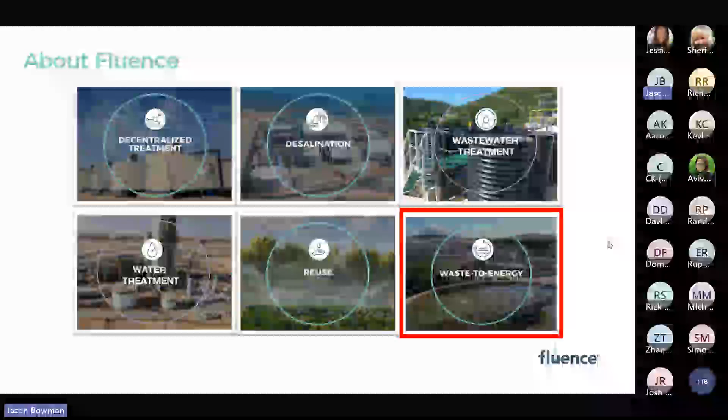There's a lot of different treatment categories associated with biogas projects. A lot of times we'll have not only the anaerobic system, but also a separate or tag-along wastewater system, a reuse system, or a potable water system in some cases that get bundled with these waste to energy projects. So it's possible to roll or incorporate other aspects of water and wastewater treatment into biogas projects under this tax incentive umbrella, if you will.

Typically, when we're doing waste to energy projects, the minimum tax credit that we see is about 30%. I'll get into the details on how this is broken down later in the presentation, but just right up front, so everyone has a basis for moving forward: anytime we put a capital expense or a cost of a project on the table, roughly 30% of that generally is qualified or approved for a federal tax credit.

So hypothetically, if the cost of your waste to energy project is $1 million, most of the time $300,000 of that is available as a tax credit. So the realized value is closer to $700,000. Again, just as an example.

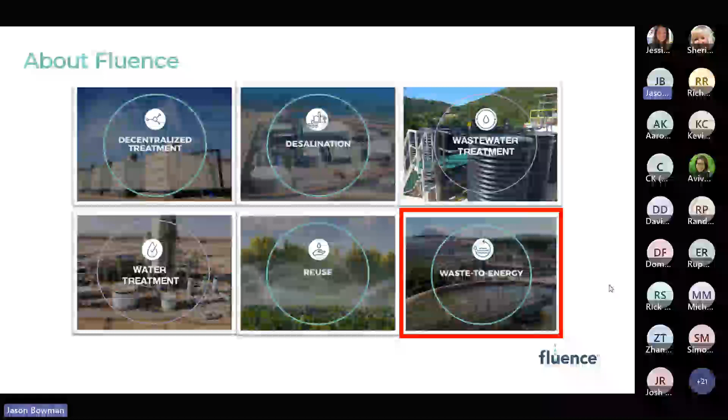The maximum, as written into the Inflation Reduction Act, is 50%. I will say in practical operation, the highest project that I've personally been involved with had about a 45% tax credit. Not to say that 50 is not possible—there's just some additional bonus areas that you really have to be aware of to maximize and reach that full 50% value.

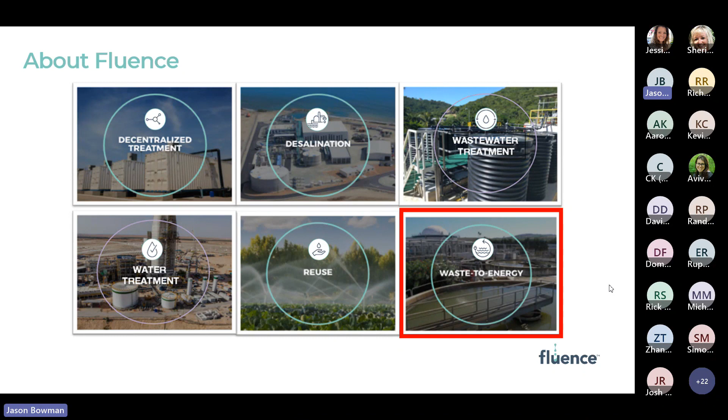So let's talk a little bit about waste to energy and what we mean by waste. When we talk about waste, we're typically referring to either wastewater or byproducts of industrial manufacturing. That could be food and beverage industry—meat, chocolates, breads, veggies, fruits—as well as CIP processes, or even just the primary wastewater discharge from a manufacturing facility.

To consider a waste to energy process, the waste obviously needs to be organic in nature, so it needs to have a readily biodegradable BOD value. We normally like to see a minimum BOD value of 2,000 milligrams per liter in terms of concentration. Below that, the economics kind of stretch out a bit. So in general, higher BOD values and low flow situations have the most favorable ROIs in terms of how quickly the project pays for itself.

The basics of waste to energy are pretty simple. You basically take an organic waste, put it into a tank without oxygen, and under the absence of oxygen, the bacteria that accumulate, or acclimate, take the hydrocarbons, take carbon, take hydrogens, put it together, and make CH4—basically make biomethane.

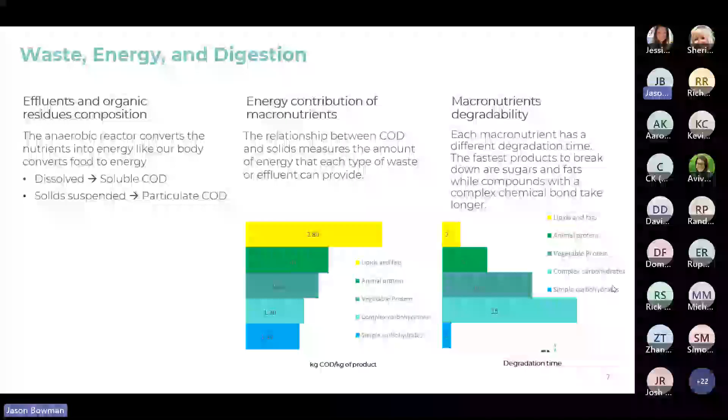Just so everyone can compare biomethane versus other forms: biomethane being CH4, propane for example is C3H8. Then you have compressed natural gas, liquid natural gas. They all have a different chemical structure, but they are all somewhat derived from the same base natural gas product. The physical application is a bit more involved.

What I want to demonstrate on this page is that understanding the feed source is probably the most critical element for a proper waste to energy design, or anaerobic design. We typically like to break down—you can call it waste, feedstock, or wastewater, however you want to define it—they're all kind of the same here, and I'll use them interchangeably a lot.

There are five main categories that we typically break it into: lipids, oils, fats, greases, things like that; animal proteins; vegetable proteins; then complex carbohydrates and simple carbohydrates. In terms of the weight of organic nature versus the weight of the waste or feed product you're putting in, those five categories all carry different energy values, and therefore they all have different degradation times. So understanding the feed source directly impacts the ROI, because it directly impacts the type of digester we determine is going to be the best fit.

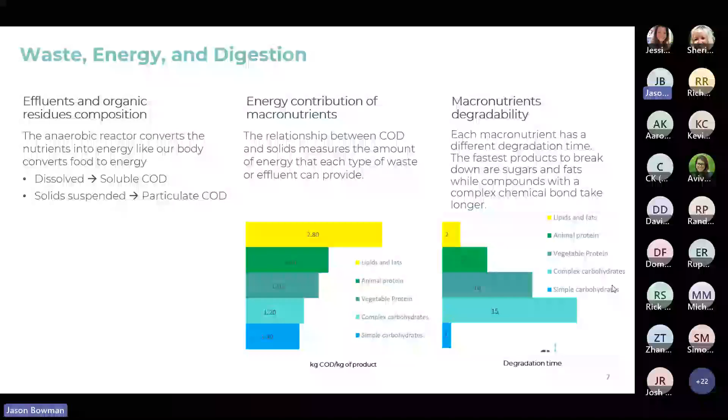It directly impacts the size of the digester. It directly impacts how much gas output there's going to be or how much we can anticipate. And it directly impacts the performance and the stability of the process. So understanding the composition and degradation time are critical as a first step.

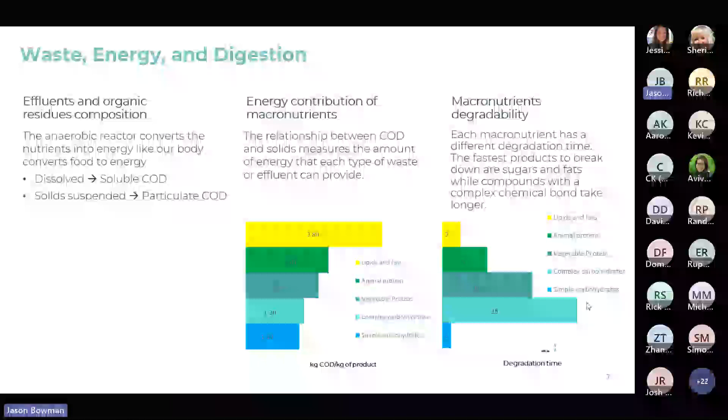So yeah, understanding how all these feeds can be applied or if they can be combined in some cases really plays a big part on return on investment. And when we talk about return on investment, basically what I'm saying is how quickly does the system pay for itself? And methods of paying for itself can be either reduction in sludge or energy production or gas production that can be used for offsetting your current natural gas needs, taking the biogas all the way to renewable natural gas where you can put it into a pipeline.

There are a lot of different ways that this can be repurposed. As long as the biogas is being repurposed and not flared, it will qualify for a tax credit. So basically understanding these feedstocks, we can determine where's the value. Is it in reprocessing byproduct or your waste product? Do you have more value using it as an animal feed byproduct? Is there more value using it for biogas utilization? So all this, how does it drive the capital expense for a waste to energy project?

In addition to the previous table here, we've kind of broken down the theoretical values of different feed sources or byproducts or waste products, however you want to define it. So in terms of the mass load of organics versus the mass load of these waste products that you're putting into a digester, it shows how much potential methane can be produced. So we can take this methane and we can convert it into electricity. We can convert it into thermal energy.

The most simple form of repurposing biogas, and I apologize, I use biogas and methane interchangeably sometimes. Technically, biogas consists of a combination of methane, water vapor, and CO2. So the methane content is typically less than what the actual biogas content is, obviously. So the simplest way to repurpose and qualify for tax credits is to basically take this methane and use it within an existing boiler.

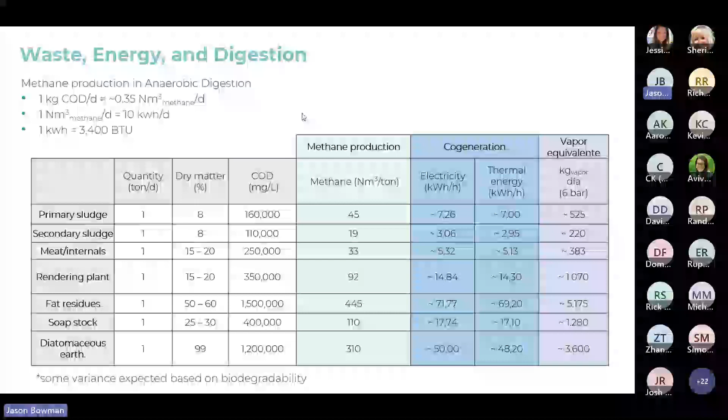That boiler could be used for steam, could be used for heat, could be used for cooking. There's a number of different ways that that can be utilized. That tends to be the simplest form that you're going to qualify for the minimum tax credits. Beyond that, going to cogeneration, electrical generation, or thermal generation, these areas really start to improve the ROI structure for these projects. We have projects out there, mid-sized projects, having a few kilowatt of power output is not uncommon.

Medium to large or larger projects, we have megawatt generators out there that are really putting out a lot of energy. Those projects definitely pay for themselves very quickly. And if there's a way to tie into the grid from that, even better. There are, let's say, kickback isn't the right word, but there are multipliers for putting energy back into the grid and additional tax credits there that really boost the value of these projects.

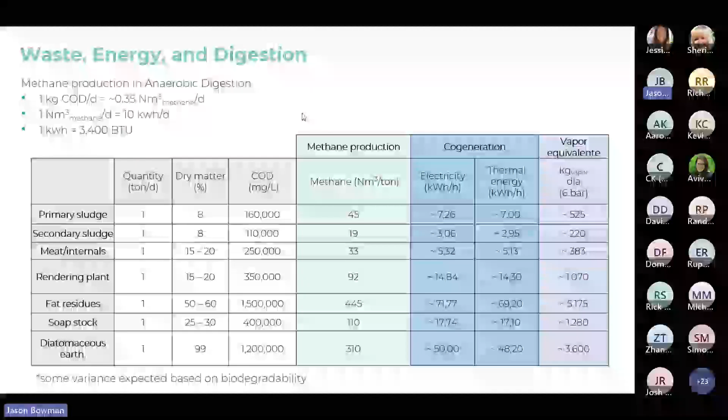Otherwise, small and medium-sized projects, it's very simple to go to electrical generation and use it internally at the factory for the production process. Depending on what your factory demand is, in some cases, we see offsets of 20, 30, 40%. It just depends on the relative nature of the waste or feedstock that we're using in the digester process. So here we've laid out a few things: primary sludge, secondary sludge, meat internals. The list goes on and on. I mean, there's so many different byproducts.

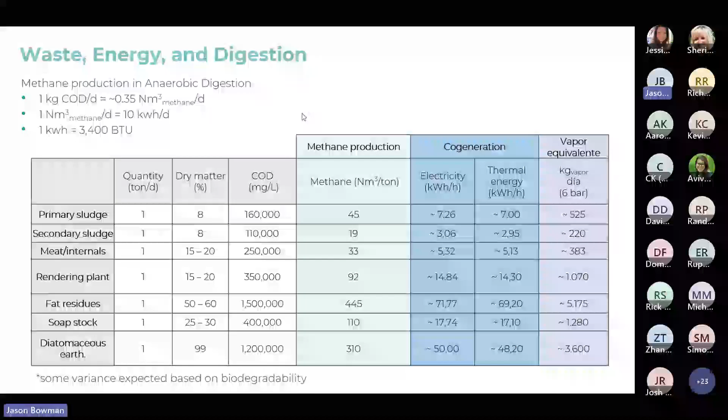Again, when you get into the biofuels, confectionaries, chocolates, bakeries, breweries, alcohol, refreshment manufacturing, the list just goes on and on. And the COD content is really all over the map. As I mentioned in the previous slide, we typically want to see BOD values greater than 2,000 milligram per liter. So roughly a COD value of, say, 3,800, 4,000 or higher. That's kind of the minimum where we would apply a digester project, just because we need to make sure that we have enough organic content there.

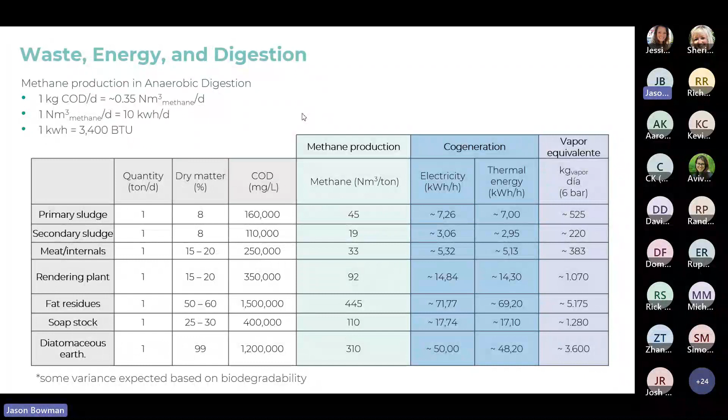But when you get to the point where you have existing waste products or waste sludges that can be combined with primary plant effluent or primary discharges, you can really start to improve the impact of the digester process.

So we briefly discussed why the feeds are important and a rough concept of how to apply the biomethane. Understanding the feed makeup is really the first step. That's the first thing that we look at. The second step is understanding how the reactor configurations differ, as each reactor has a different economic impact. So there are different operating conditions required to maximize the efficiency based on the type of feed that we have.

So that's why we have so many different options for anaerobic digestion. We have your more conventional continuous stirred flow tanks. We have a recuperative thickening process where we have a digester in combination with essentially a glorified DAF unit that we use to boost the bacterial populations, boost the solids populations. And then we have granular technologies when you have systems that have more, let's say, soluble, basically just liquid, and it's like sugar water or starches, things of that nature.

Historically, anaerobic systems were quite big and bulky. Most of the antiquated systems are like old anaerobic lagoons. You don't really see a lot of new anaerobic lagoons being built. Can they work? Yes. Do they work? Yes, but it's not as efficient, very land intensive, and the biogas collection out of a lagoon process is completely different than these more high rate standalone tank options. Much more homogeneous biogas collection, biogas capture, more stable biogas production in these types of systems compared to the old school lagoons.

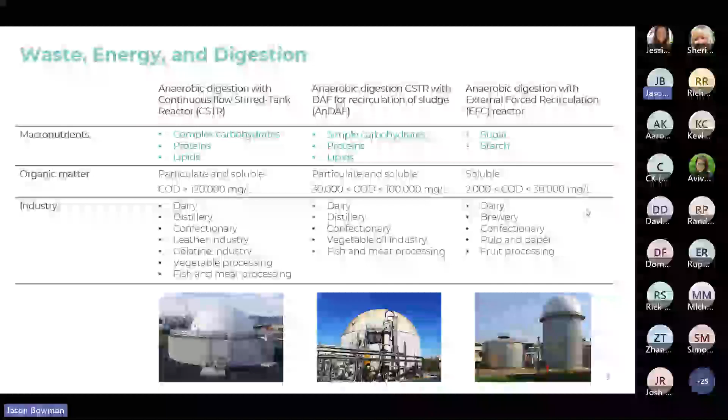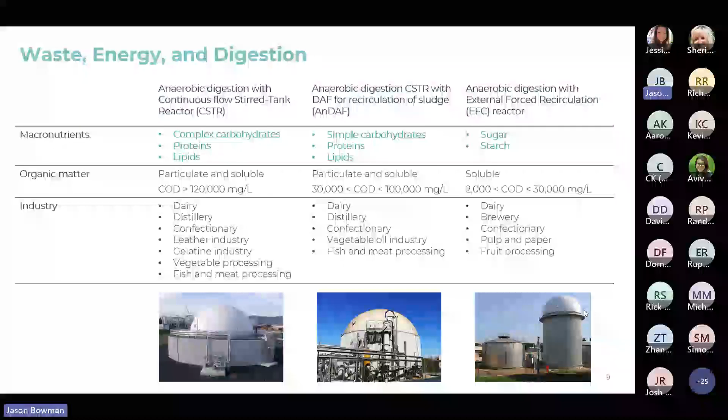Hydraulic retention times typically can be a few weeks to only a few hours. Again, it depends on the type of digester process and the type of feed, byproduct, or primary effluent that we're trying to process here. So most projects that we are currently involved with, I will say the ROIs, factoring in tax credits, factoring in disposal costs, are probably in the 2 to 3 year window, also factoring in the electrical cogeneration side of things. So these projects pay for themselves very, very quickly, and the tax incentives have a lot to do with that.

So the optimal projects, just to recap, are typically those with significant hauling costs that can convert waste to electrical generation. These projects are going to have a very short return on investment. And in addition to that, and later in the presentation we'll hit this in more detail, there are methods for actual revenue generation from these facilities, whether it's electrical revenue generation or renewable natural gas generation. And there are some newer methods out there, which we'll talk about briefly at the end of the presentation, where we can basically do an energy storage or even a data banking, data mining option. Again, these are relatively new, but those are new ways to generate revenue on site for decentralized facilities.

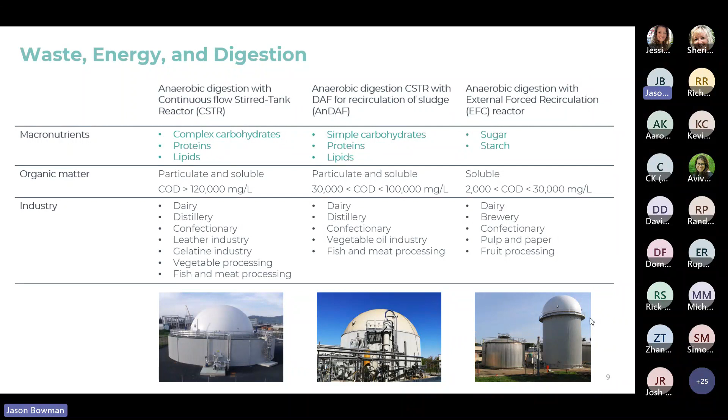So briefly, before we get to the tax credits, part of what the Inflation Reduction Act, part of what the EPA, part of what Congress, part of what everyone is trying to do is boost the sustainability aspects of not only these projects, but just life in general.

You turn on the news and there's always some crisis with famine or water scarcity or even water pollution. So what the United Nations has done is basically set up a list of sustainable development goals aimed at setting minimum metrics to ensure quality of life, environment, and geopolitical landscapes. Obviously, clean water and combating water scarcity is at the front and center of that.

Europe has kind of been ahead of us here in the US in terms of how biogas has been applied and how it can help improve or promote energy independence for industry specifically. So they've been ahead of us for a while here. The beauty of all this is it's relatively simple to create a positive and circular impact for most industries.

If you're an industry that produces a lot of waste, either wastewater or waste byproduct, liquid, solid, slurries even, if it's high on organics, there is an inherent potential here to put this to work while creating a more long-term sustainable business practice, but also a better environmental impact.

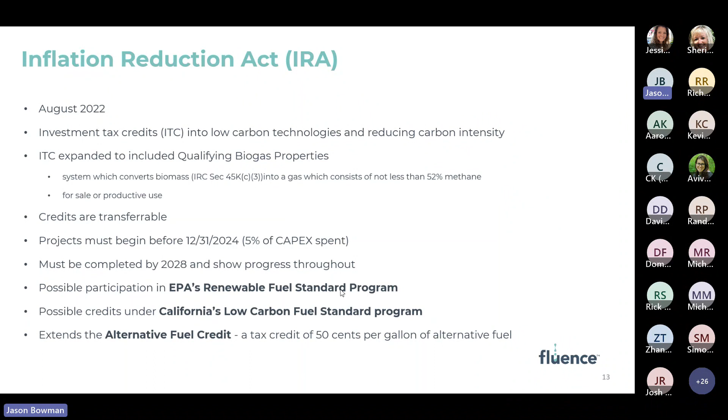I believe that is on the next slide, I apologize, I'm getting ahead of myself. So the maximum investment tax credit for qualified biogas properties is 50%. You can find this information in sections 45 and 48 of the Inflation Reduction Act.

Basically, the program establishes a base minimum of 6%, but most projects qualify for prevailing wage, so there's a 5x multiple on that 6%. That's how we arrive at this 30% eligible tax credit. Most projects I've been involved with in North America, 30% is kind of the minimum, that's typically where most projects start.

There are two potential bonus credits, one being an additional 10% for domestic content. Essentially, what you have to show is 40% of the manufactured goods for the biogas project are local costs - 40% of your steel, your pumps, equipment, erection, installation, a manufactured end product. If 40% of that is domestic content, then there's an additional 10% bonus, so fairly easy to arrive at a total ITC of 40% in these cases.

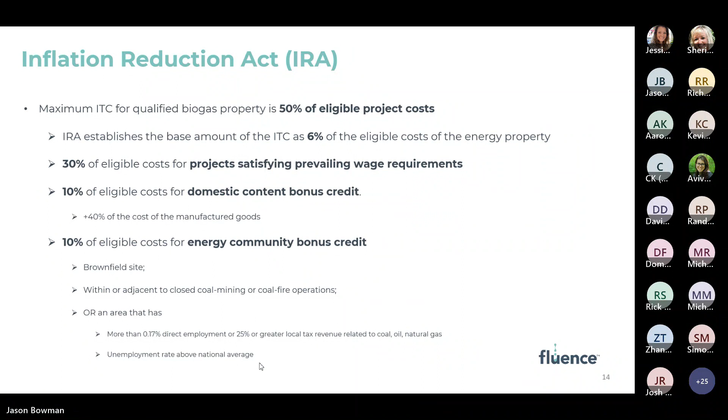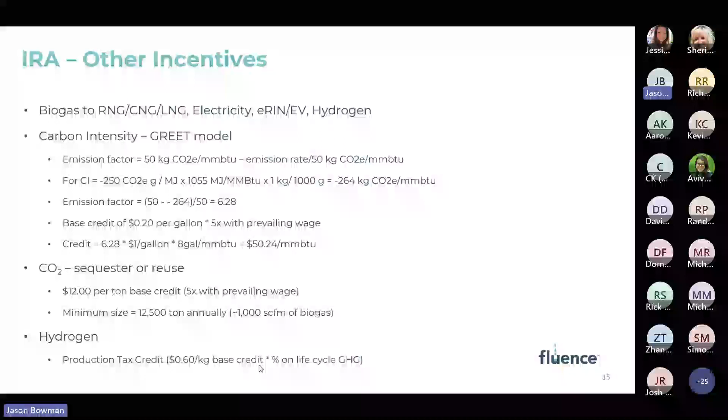I briefly mentioned hydrogen, CO2, and other ways of incentivizing the biogas. It gets a bit more complicated when you're talking about emissions factors. The GREET model is probably most widely used to determine the ins and outs of your emissions factors, but there is certainly a way to improve your carbon intensity scores. And if you can do that, there's additional credits in terms of electrical or heat generation from this process.

There's also the potential to have significant tax credits for sequestering CO2. These projects have a minimum start point - you need to have at least 1,000 CFM of biogas for this to really start to make sense. So, just to put it in perspective, those are very large projects. That would be tons and tons, tens and hundreds of tons of waste that would have to be generated to have that much biogas output. So this typically is more like for your regional cogen facilities where you have tipping fees and people bringing waste product into a facility specifically for co-digestion.

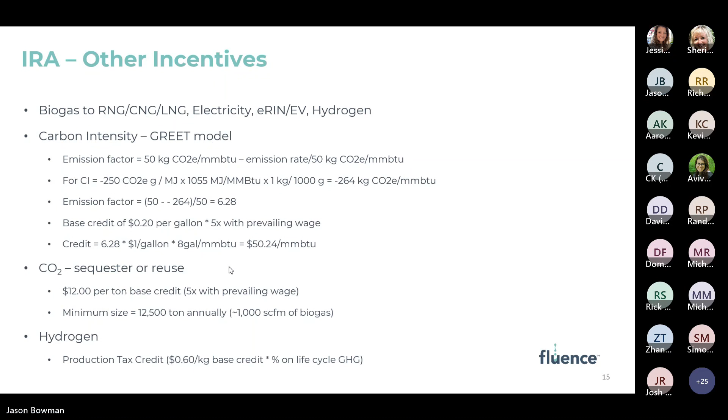So now that we've gone over the basics of the Inflation Reduction Act and the tax credits, we can turn our attention to more specific applications and see a few examples of how this can be applied.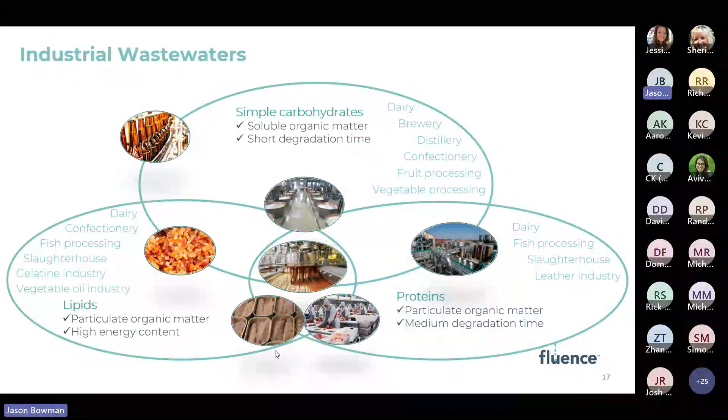As far as potential feeds that we can process, we typically process primary sludges. If you have existing dissolved air flotation systems that generate excess sludge, and that sludge is not a current revenue source but a disposal cost, this is arguably one of the best areas for digester projects and return on investment. Excess sludge from existing wastewater treatment facilities is another option.

If you have an existing aerobic facility with waste activated sludge, that's a consideration. Organic byproducts—anything with meat, proteins, sugars, things like that—could be liquid or solid. Fermentation broths, fats, oils, greases, like salad dressing manufacturing or condiment manufacturing, anything with a high BOD or COD value.

We can look at treating these as a one-off or standby, so you can have a smaller digester that maybe only handles your existing sludge from an existing wastewater facility—very economical, very low footprint. Or for new facilities looking for brand new complete wastewater treatment plants, you may use a digester to treat the entirety of your plant effluent.

As we build out the digester process with a more complete wastewater package, we look at what we can do internally to recirculate any sludge or biological byproduct generated from a wastewater plant, so we're digesting as much as we can and reducing disposal costs as much as we can. That's going to have a very favorable return on investment.

Current drivers for waste to energy projects include existing surcharges. If you're discharging liquid or solid waste right now to a municipality, a lot of times you can be fined based on concentration, liquid flow rate, or the pounds of organics and solids you're putting down the drain daily. This is a very favorable driver for waste to energy—you can turn that cost into actual revenue, or at a minimum, decrease your operating cost at your facility.

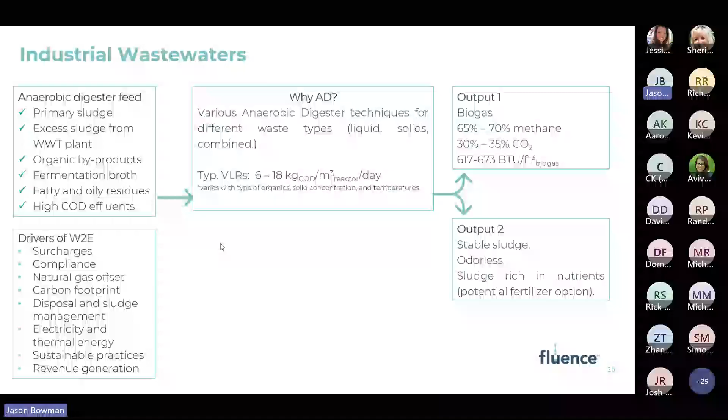Compliance is also obviously a big driver. You can't put anything down the drain unless you're going to meet minimum effluent discharge requirements, whether it be BOD, TSS, nitrogen, or phosphorus in some cases. So this is something that we consider as well.

Additional drivers for waste to energy: if your site is using natural gas for boilers or to run steam, etc., you can directly offset your natural gas usage from a waste to energy process.

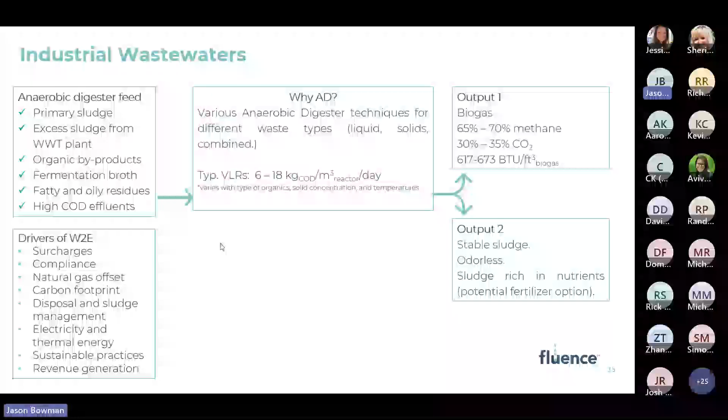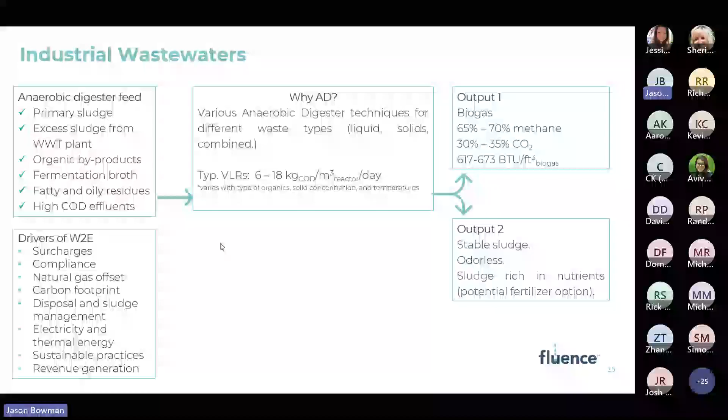Disposal and sludge management, electrical and thermal energy—we've covered those. There's also the sustainability aspect. A lot of industries are under the public eye these days to have the most sustainable business and operating practices, and these waste to energy facilities can certainly assist with that and boost sustainability platforms and scores. In certain situations, these projects can be revenue generators, depending on the size of the project and the type of feedstock.

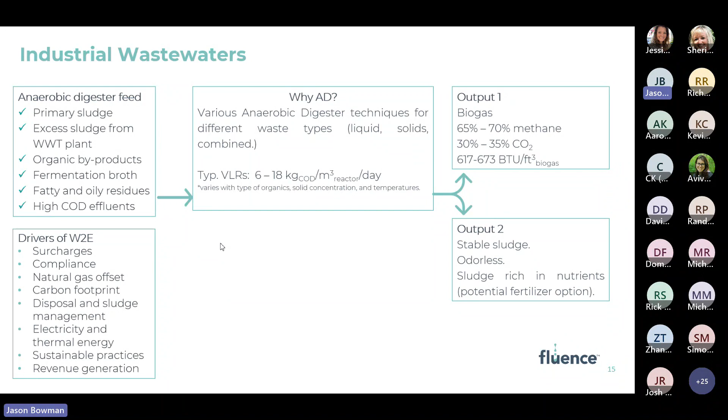If we talk about the operating expense of these waste to energy projects, typically with a digester there is a positive net energy balance. We tend to think in terms of how much biogas and methane output we have. We like to see projects that start with 150 cubic feet per minute of methane generated—that's a nice starting point, all the way up to 1,000, 2,000, 3,000 for large projects.

If you're thinking about an existing wastewater treatment process and adding a digester, there is a direct reduction in chemicals and a direct reduction in disposal costs for sludge or byproducts—big ROI there. The average rate in the US for a tanker to move 6,000 gallons of liquid slurry, sludge, or byproduct is probably $1,000 a truck. We've been to sites with 40 trucks coming in and out weekly—that's $40,000 a week in disposal costs.

So it's possible to take what you're currently disposing of, put that in a digester, generate biogas from it, get a tax credit, cut your hauling by 80%—maybe more in some cases—and have biogas and electrical generation.

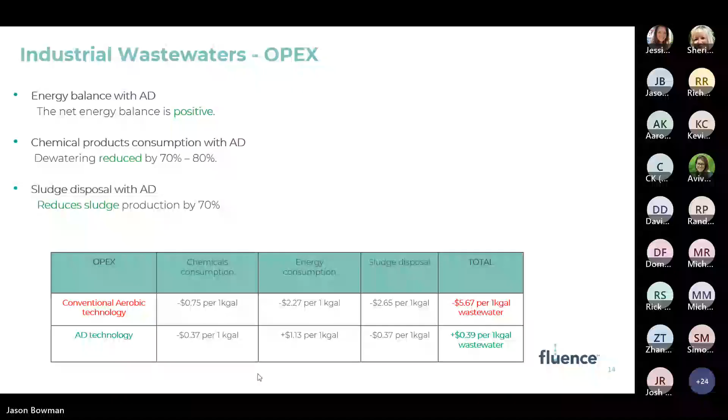So now that we've covered that, we're approaching the end of the presentation. I realize we're coming up on 1:45 Eastern time, so I'll try to wrap this up in the next 5 minutes. But I wanted to leave you guys with an example of what a biogas project may look like for a specific industry. Here I've chosen poultry, since we have a significant foothold in poultry and meat operations. So, a typical biogas project...

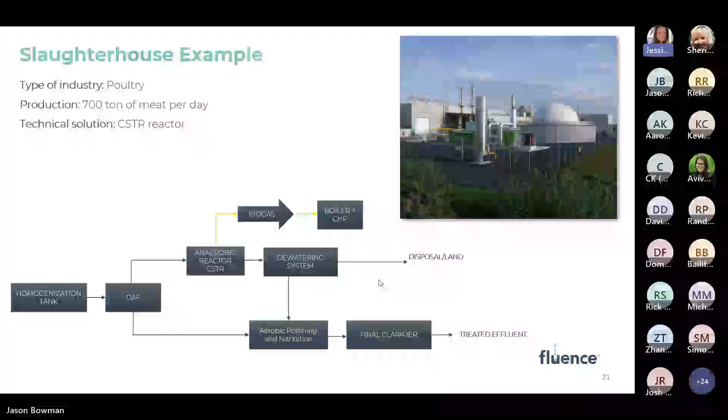Oh, you had it—it was all in the back seat. The envelope, the big pamphlets, in the back seat. Jason, it looks like you're muted. Oh, thank you—how about now? All right, should be good now. I can hear you, thank you, thank you, thank you.

Yeah, so typical biogas project for a poultry facility. I chose poultry just because we have a significant foothold in the poultry business, but it could be biofuel, distillation, brewery, confectionery, bakery—you name it. We have a large installation base out there. Poultry is interesting because of the relative strength of the waste compared to the volume generated, with a lot of different streams coming in.

Poultry processing, as a rule of thumb, uses 3 to 4 gallons per bird on a daily basis—a lot of water usage. So you see poultry plants typically with 1 to 2 million gallons a day of primary effluent discharge. In these cases, it's sometimes not most economical to put an anaerobic system on the full primary effluent. So what we'd look at is the byproducts from the facility instead.

99.9% of poultry processes use dissolved air flotation (DAF). So we'd look at a digester that takes the DAF sludges and byproducts from operations and see what we can generate. This is a very common approach for poultry and meat in general, and also for many other industries with side streams—spoiled product, off-spec product, spilled product, condensate lines, drip lines, and so on. All that factors in. We'd typically take the sludge from the DAF process, high in COD and solids, combine it with other byproducts, feed it to a digester, and create a biogas generation process.

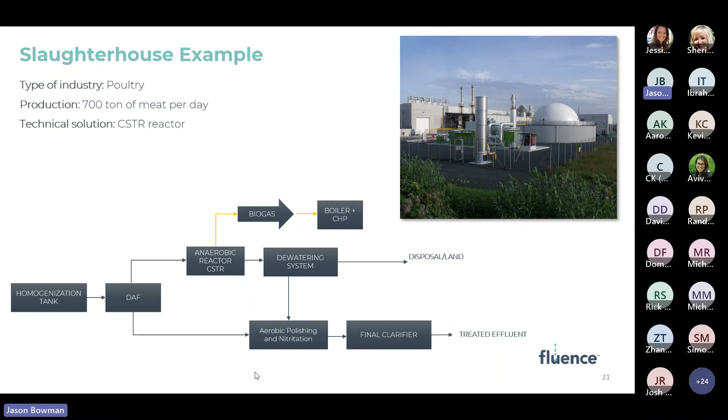So this is what a typical process might look like. If we zoom in on the sludges coming out from the primary DAF unit, we have about 34,300 gallons a day, with a COD concentration of about 150,000 milligrams per liter, or ppm.

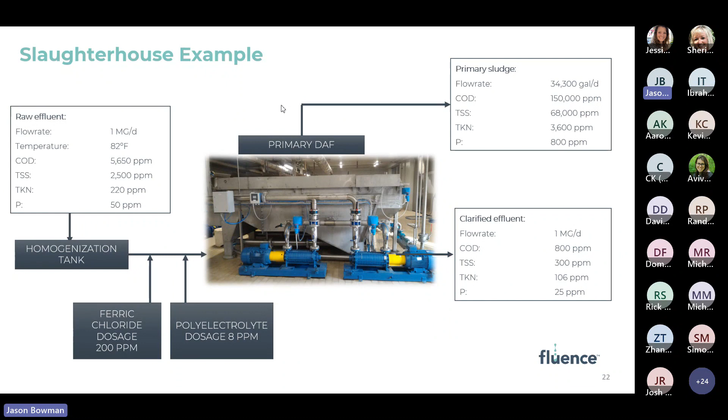So, very high COD value. We're taking that COD value from this primary sludge to a digester, generating a biogas flow rate of over 300,000 gallons a day. That is significant, enough for a 1 megawatt generator.

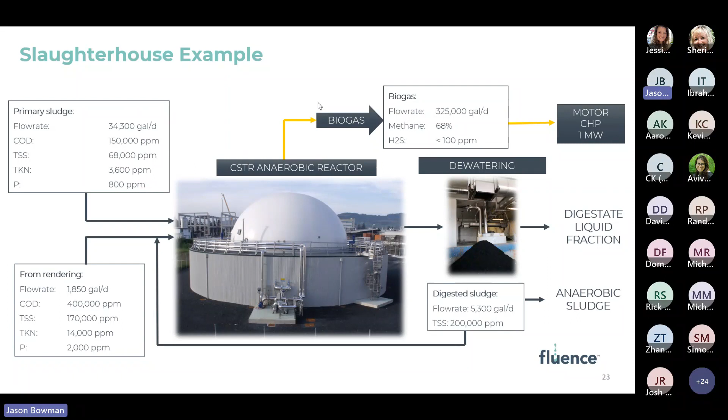So again, here we're talking about a facility with a primary discharge of 1 million gallons a day. Of that primary discharge, we're taking about 3% to the digester process and able to generate 1 megawatt. That is a significant energy output. This particular site paid for itself in about 3 years building the system this way.

I won't get into much of the side stream treatment, but what you should understand is the digestate that comes out in some cases is void of nutrient. In other cases, it will have nutrient - and when I say nutrient, I mean nitrogen and phosphorus. So sometimes we do have to add a polishing step to make sure we can get that nitrogen and phosphorus down to a point where we can discharge the final flow out of the facility.

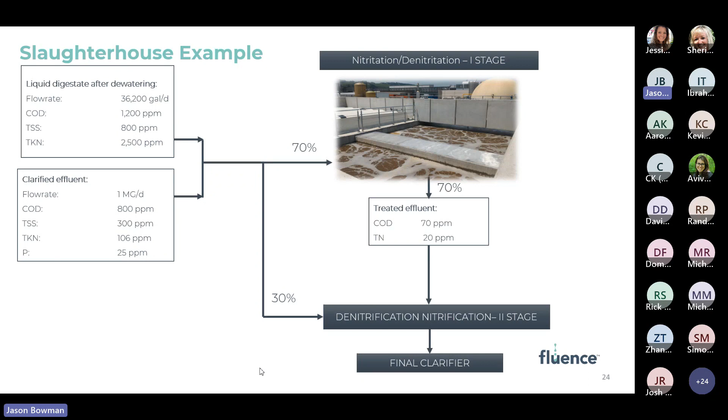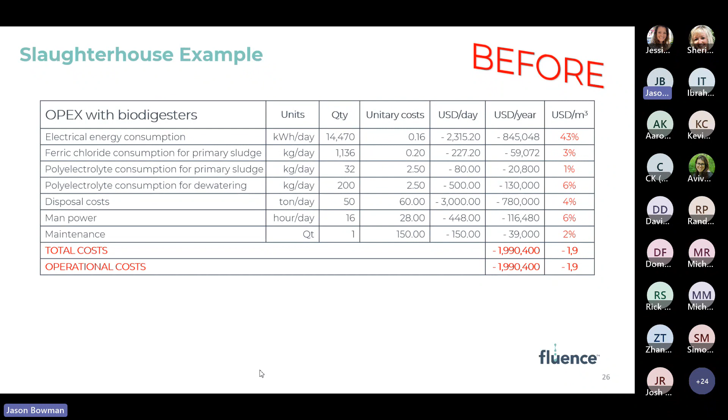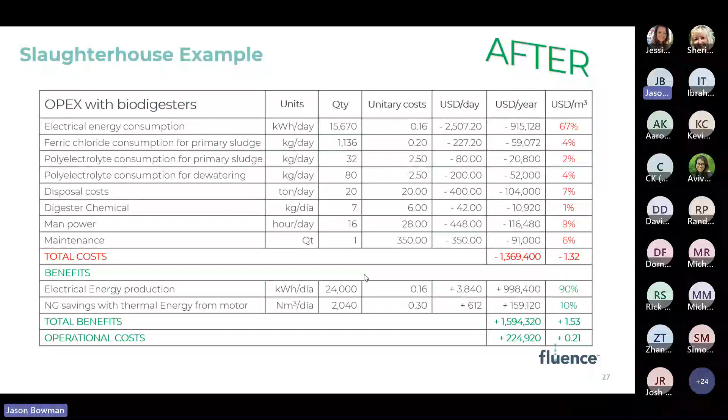If we take a look at how the system was operating before the digester upgrade and after, by adding the digester to this process, that 1 megawatt generation generates about $1 million of energy production on an annual basis. Fairly significant for this facility, really decreasing the return on investment for this project. They went from paying millions of dollars a year in operating costs to actually having an income, because in this case that 1 megawatt generator is going back to the grid.

So to wrap this up in a nice, neat nutshell, when we look at these projects and try to define the ROIs, the main factor is the strength of your wastewater relative to your discharge permit. The strength of the wastewater drives the size of the digester, therefore the cost of the digester, and whether polishing steps are required.

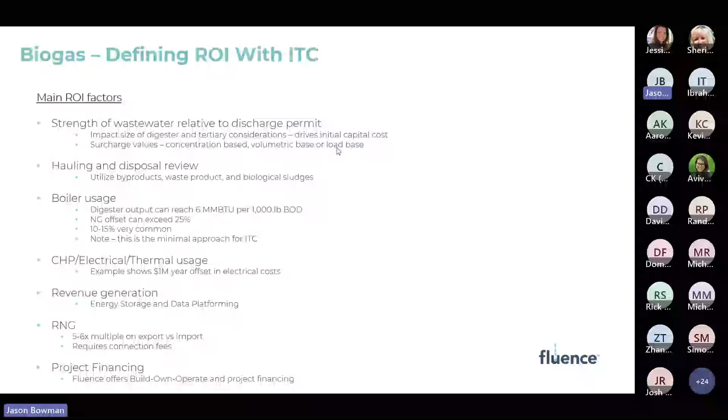Surcharge values - obviously some sites pay a few thousand dollars a month, some pay a few hundred thousand a month, a different economic picture. In either case, we evaluate what the surcharges are and how that impacts the overall return on investment. Hauling and disposal costs, obviously a big impact that we've kind of beaten to death today.

Boiler usage - again, this is the simplest and easiest thing to do with these digesters, take the gas back to an existing boiler. That's the easiest way to get a tax credit. It's not necessarily a revenue generator, but it is a way to reduce the cost of the system because you're repurposing the biogas.

Going to CHP, electrical or thermal usage can be a revenue generator. Some of the newer options on the market, as the new RINs come into effect - the E-RINs, electrical tax credits - will be coming in the future.

There are methods to put energy storage and data banking platforms on site. Picture this futuristic model where Google comes in and puts a data server adjacent to your site, uses some of the energy you're generating from your facility, and pays you to use that energy for data storage. So potential revenue generator there - we'll see how this plays out.

RNG, we've covered that. And then project financing - obviously your project financing capacity directly impacts the ROI on your projects. Fluence does have financing and build, own, operate capacity. It depends on the size of the facility and your specific objectives, but this is something we can also approach.

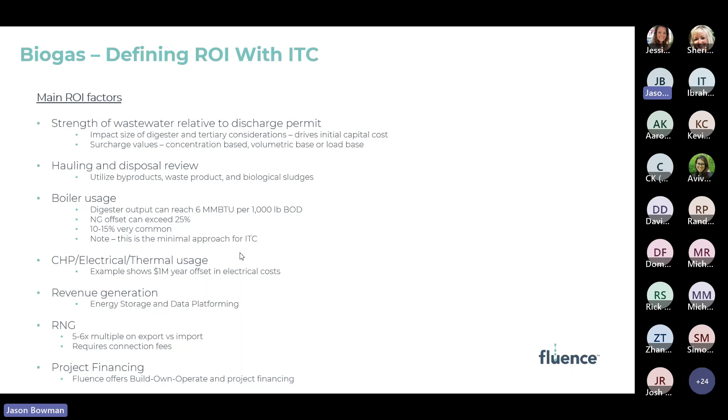So to wrap things up in a nice, neat nutshell, just to give you an idea of a few industry-typical ROIs with the new ITCs: most projects we're seeing today are going to have a 2 to 3 year return on investment. These anaerobic projects tend to start around $1 million and can go upwards of $30 million. It just depends on your specific production facility and what your wastewater looks like. But in general, with the tax credits, the ROIs on these systems are very short - at least with the systems Fluence designs and typically looks at.

That, my friends, is the 30,000-foot overview. I know we're coming right up on 2 o'clock, but maybe we can get back to any questions. Let me go to the...